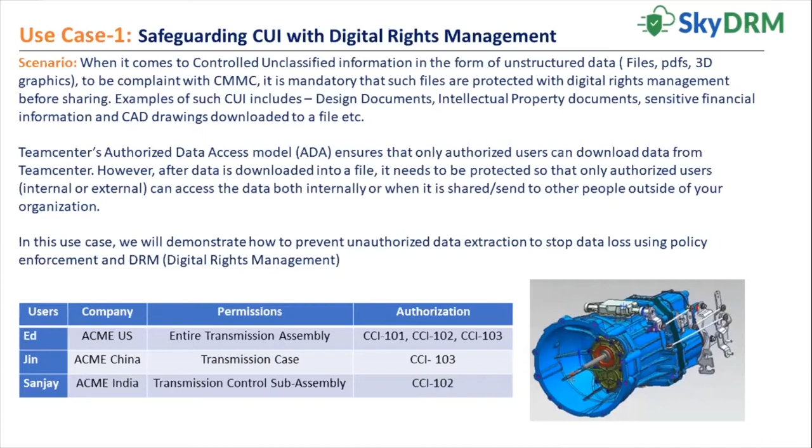So in this use case 1, we're going to have Ed, Jin, and Sanjay, all from Acme, but each from a different Acme facility. Ed is going to have access to the entire transmission assembly. Jin is only going to be able to work on the transmission case, and Sanjay can work on the transmission control subassembly. Each of them have an authorization stack that controls their access to information, as you'll see.

We will start the demonstration by having Ed sign into SkyDRM.

Once Ed signed in, he's notified that he's now online. Ed can go in and also sign in from his desktop into Teamcenter, so he'll be signed into both SkyDRM locally on his desktop, as well as signing into Teamcenter from that same desktop.

Once Ed is into Teamcenter, he can load up and take a look at that transmission assembly that we spoke about earlier, which we'll be using during the demonstration. Here you can have a breakdown of the different components, and here we will see the IP classification.

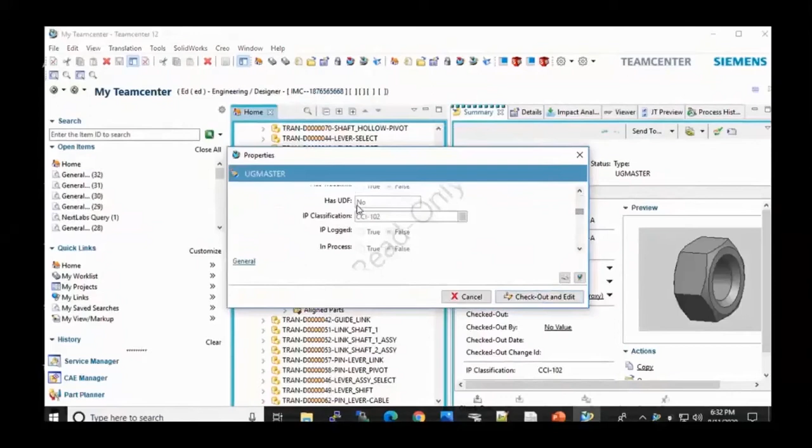You can also go in and look at the properties itself in more detail and go down through, and here we'll see the IP classification that was specified, which, as you remember, we defined within policy to be used for users' access into these files, whether they're allowed or not allowed access.

Ed will now take a look through the structure manager, and here we can see a breakdown of all the materials. In this case, we're going to see that as well as the IP classifications that are specified for each of these parts and the assembly itself.

So here we can have a drop down look at the values. He could change these up if need be, depending on the needs, as well as NextLabs being able to protect that, which is one of the seamless integrations between Teamcenter and SkyDRM.

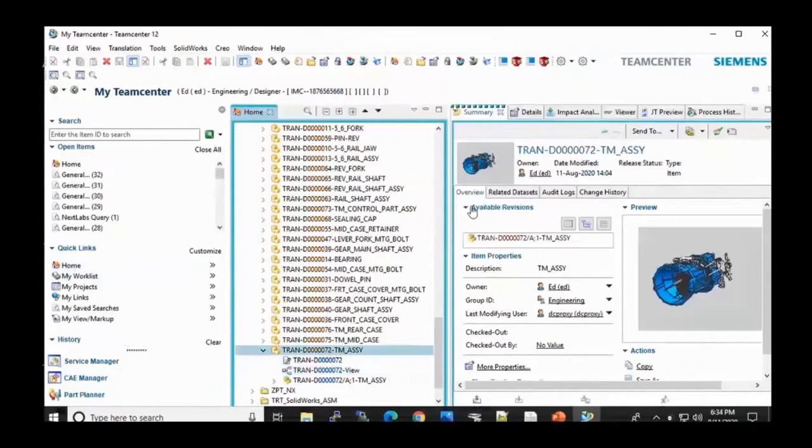Here you can take a look at the full assembly of the transmission. He can now load up the NX client. In this case, we get the full view from the NX client of the transmission as well as the subassembly.

Since Ed is in the headquarters, he has full access to the entire transmission and the subassembly, which you're seeing on the right-hand side.

He can go in and look at the different rights that's been applied to it from NextLabs. So in this case, we're going to get a listing of information that'll show, based on each of these parts, what they can actually do with them - in this case view, print, save, and so on. Or if a part's not protected, it also shows that as well.

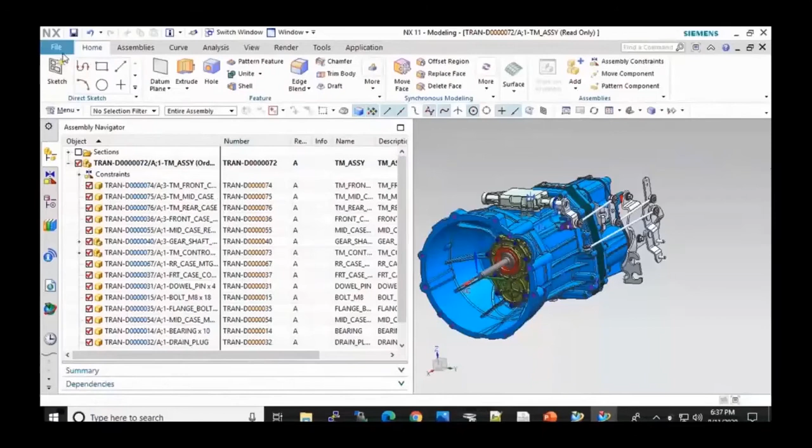Ed can now go out and export this transmission assembly. In this case, he's exported to a local drive, and here we will see all the parts that are listed as well as the .nxl extension, which means that these are all protected by NextLabs.

Here you can go out in NextLabs, view the file information for a particular part, and it'll show what's been applied - so view, print, reshare, save as.

Again, you can look at different parts and show the different rights that are applied to each of these. He'll now go in and look at the subfolder of transmission casing, so we can see other assembly parts and pieces that are available that have been downloaded.

Now we're going to go out and sign in as Jin. If you remember, Jin is one of the users that's from China, from Acme China, and he's going to sign on to SkyDRM as well, and now he's going to take a look at those same parts that have been downloaded to that desktop.

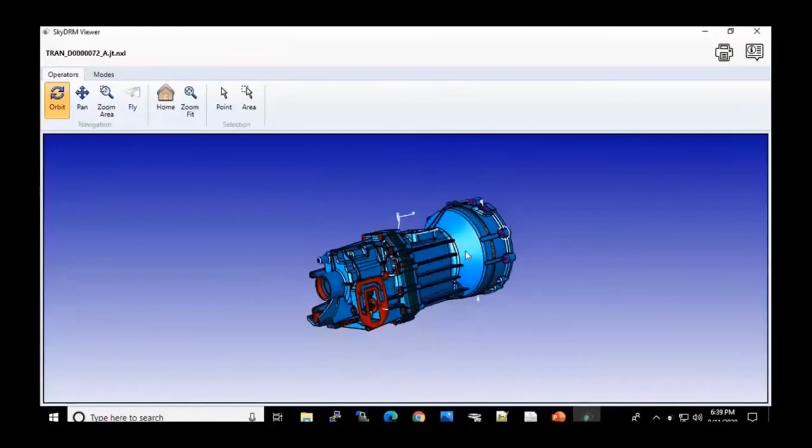In this case, when he views the information and tries to load it up, the SkyDRM viewer will show him what he has access to. So in this case, since he's from Acme China, he has a view of the case itself - he doesn't get to see the entire assembly, just the case and the associated parts of that.

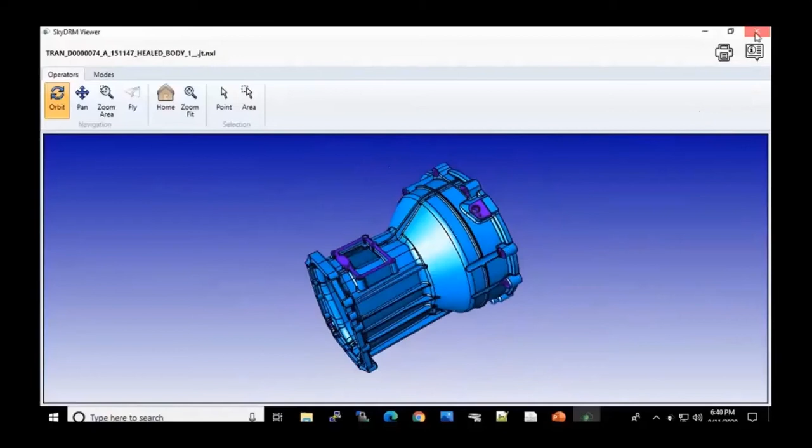Here we'll see that if he views another file, it'll load up and he can actually see a breakdown of the case components and the different pieces that make up the entire case assembly, but again, not being able to see the subassembly components since he doesn't have access to them.

Here we'll see that he can go in unmanaged mode, so this way not connecting to the Teamcenter instance that Ed was on, and look at it through the NX client. So here he can do a view, and it'll load up what he's chosen as far as a part or the assembly itself.

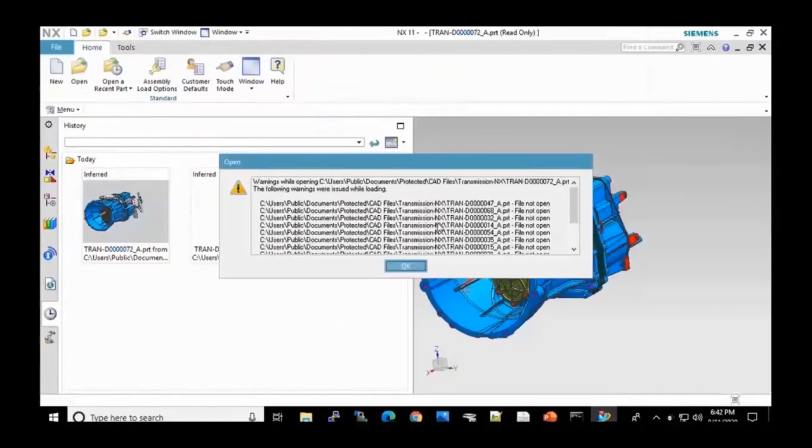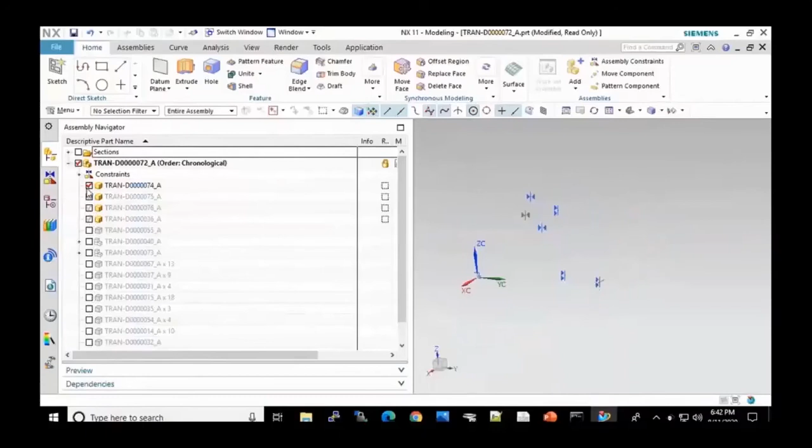And now we'll see those are the files that he cannot view and cannot be opened, but he can view the case and all the components that make that part up that he has access to. You'll see the other ones are grayed out. The objects that he can view, he might have only read-only access to, and he can uncheck or check the ones that he can see, but the other ones will remain grayed out and he doesn't have access to them.

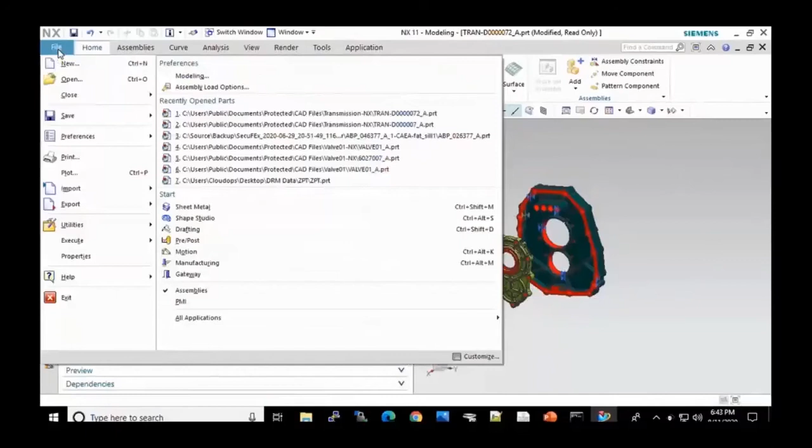He can also look at the file rights here. And again, it's going to show the same thing we saw earlier, where the ones that he can't see and the ones he can see in this case are protected, and what capabilities he has for those particular files that he could see.

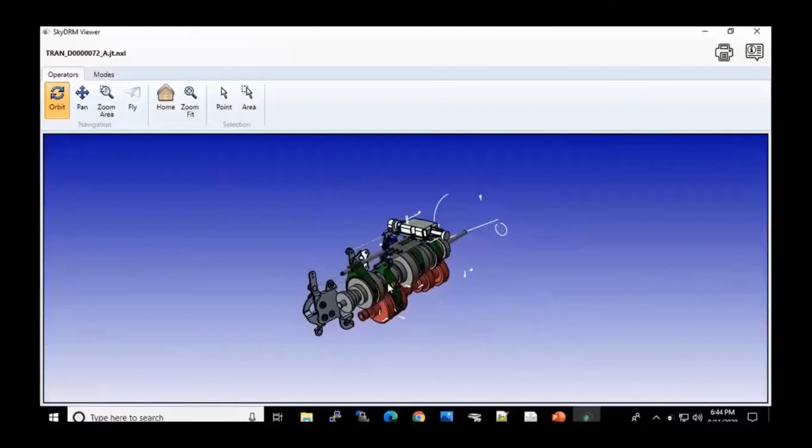Now our last user, Sanjay, if you remember, Sanjay's from India LLC, Acme. He's going to go out. He's logged in through SkyDRM desktop. Again, he can view and look at those parts through the SkyDRM viewer as well. But as you can see here, he can see the subassembly components. He does not see any part of the case because he doesn't have access to it. Here he can expand out the list again.

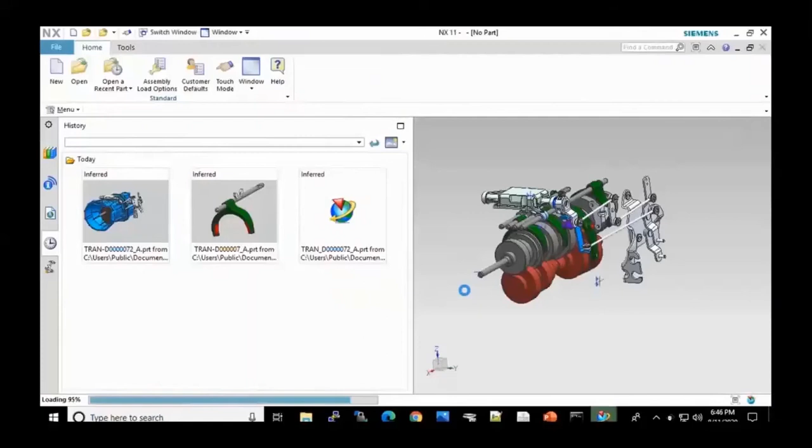Again, sign in through the NX client in unmanaged mode and look at a particular part. When he opens it up, here we'll see that there are certain parts that are protected again because he doesn't have access to them, but he does have access to the ones he's allowed based on the policy decision that was made based on that user and the attributes of both the files as well as what was defined within Active Directory. So here he can see that subassembly but can't see any of the case.

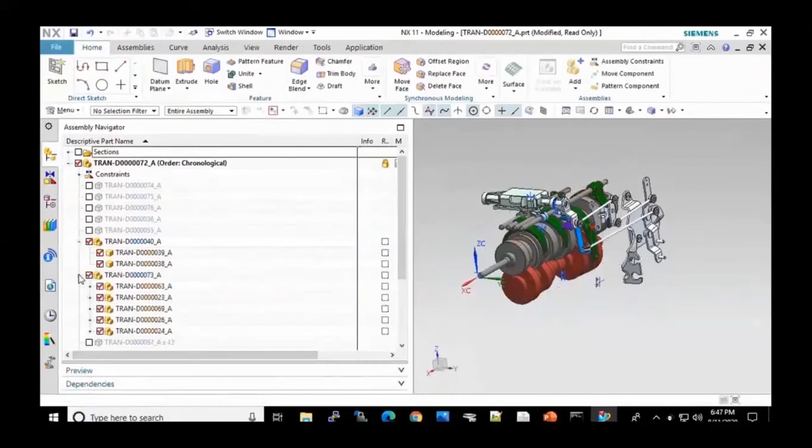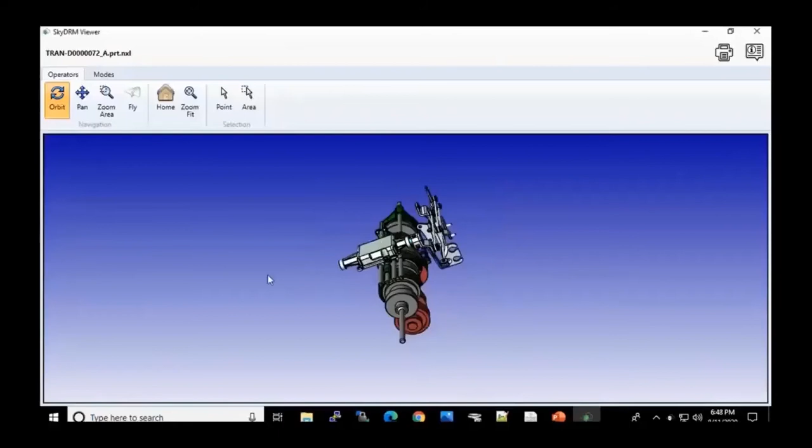So here, based on the three users looking at the same files, they have different views of what they can and cannot view, and that's all based on SkyDRM and its ability to protect certain parts of the assembly from users and their ability to access it. Here we'll see Sanjay at the end being able to use the SkyDRM viewer and view the subassembly.

So when we take a look at use case number 2, we're focusing on supplier collaboration. The scenario is this: only Acme LLC users with the appropriate attributes can see the entire transmission assembly and parts therein. Ed Tyler, you remember him from the first use case, uses Teamcenter and can see the entire transmission assembly at any time. Ed needs to share the assembly, though, with suppliers outside of Acme LLC, but he has to ensure that the suppliers only have access to the parts they are authorized to see.

Ed will need to monitor the files to ensure the supplier does not accidentally share the data with unauthorized personnel, as well as be able to revoke permissions to the file, after which the supplier will no longer have access to it. In this example, we'll look at how to securely collaborate with suppliers while monitoring how the files are used and revoking access to the file when it is no longer required.

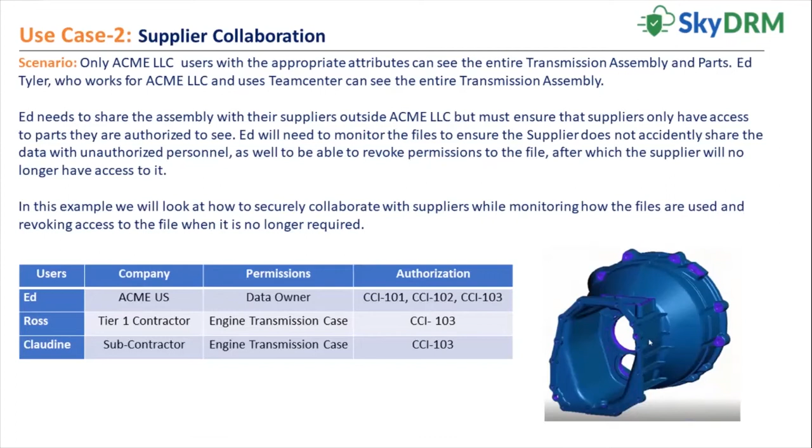Once again, you see that there are 3 users. There's Ed from Acme, but now, versus use case 1, we have Ross and Claudine who work for contractors and suppliers outside of Acme LLC. They have permissions, as you see there. Ed is the data owner, and Ross and Claudine can only touch the engine transmission case. Each of them has an authorization model, as you see there.

We will start off the demonstration by having Ed sign into SkyDRM. You remember, he's the project manager. So Ed will have a full view of all the projects that the other users will access. In this case, the Engine Transmission 100 project, the Engine Fork project, the Engine Cases project, and the Engine Bearings project as well.

Here we'll see Steve is one of the members under the Engine Bearing project. Ross is a member under the Engine Cases project.

Ed can now go into the Engine Transmission 100 project, and we will see the files that he has available that are now protected by NextLabs. In this case, he will look at the information based on policy that's been defined against these files. In this case, we're looking at the casing that he wants to go out and share with the other users. Here we can see rights for other files and the classifications for that file as well.

So if we go back to the casing, he's now going to do a share on the file. This will bring up a screen that will show the different projects. In this case, he will check off the engine cases and share that protected file with the engine cases project.

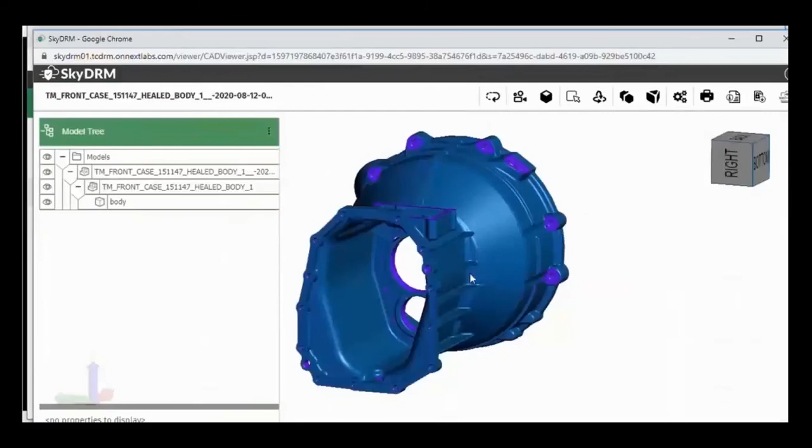Here she can go out and do a reshare if she chooses to, since she has that capability, but in this case she's not going to reshare it with anybody else. She's going to open up and take a look at it to see what it looks like. So here it will display within the SkyDRM viewer, and we can see that she can see the engine case. She doesn't see the entire assembly, but she can see the engine case that's been shared with her.

Claudine will now log out. Now we're going to have Ed, the project manager, log back in again to SkyDRM. As mentioned before, Ed has access to all the projects.

In this case, he's going to go into his original engine transmission 100 project and look at the files that he had shared. Here's the transmission assembly and here's the case. He can look at the log and see, as we looked at it before, that he was able to protect and share it. Ross reshared it, and Claudine was able to view it and looked at it a few times.

At this point, Ed will see and look at the projects that he shared this with, and now he wants to revoke the rights to be able to look at that file. So in this case, he's going to do an update and successfully revoke the rights of the other projects to take a look at that case.

So by him removing that, he can go back down, take a look at one of these other projects, and look at the files, and you'll see that that case is no longer in the shared with this project folder.

So now we're going to log back in as Ross. In this case, when Ross goes down and opens up the engine case and looks at the files that were shared with him, you'll no longer see that engine case that's available that was shared before. Since Ed revoked it, he no longer is able to see that file.